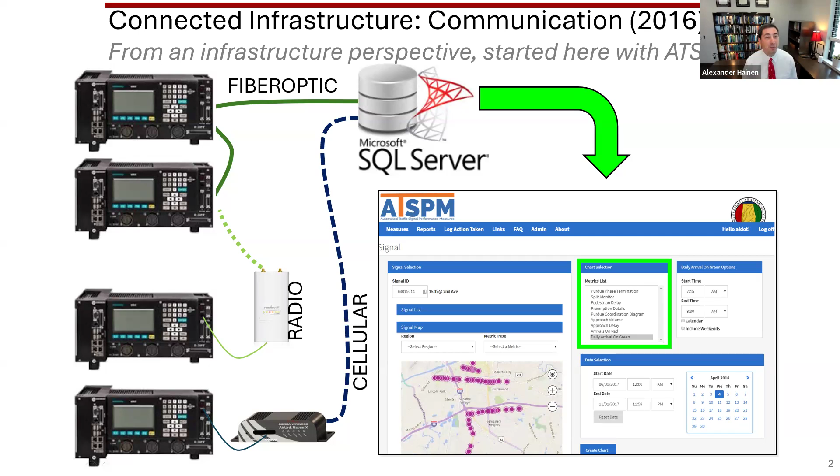A lot of the work that I do these days involves either getting data, seeing what's happening, or components communicating with one another, as you'll see. It was very unusual that Tuscaloosa did have an existing fiber network. So we've evolved that, we've added to it, and it's something that's a great asset that we rely on. However, you do see some other technologies such as radio and cellular that we were able to work with. So this is very old. This was the starting point. This is where it started.

On the ATSPM part, we had a colleague from Oak Ridge National Lab here this week talking about smoothing traffic, and that's what we're after too, is we're trying to look at arrivals on green.

Steven has a hand up.

Steven had a hand up. Okay, I'll just keep going here. Sorry about that, Steven. Sorry, that was an accident. Oh, okay, got it. All right, I was perfect.

So this is one of our corridors here in Tuscaloosa. Percent on green was one of the performance measures that we used very early on. It was very, very powerful for us. So we worked on a lot of coordination projects with the DOT. And for me, this was my first few years working with DOT engineers here in this state.

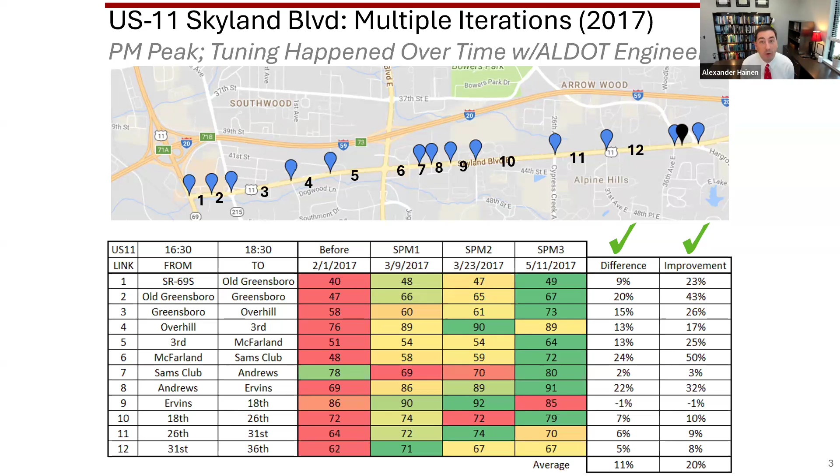That is a key relationship, and I just want to make sure to acknowledge all of their collaboration. This is something where they kind of took a gamble and said, this sounds kind of weird, but let's give it a shot. And it has grown and grown and grown, which is what you'll see.

Speaking of growing here, this was our second version of our TMC, our Traffic Management Center. We didn't have one here in this region. There may have been like a computer that was perhaps dedicated over at one of the area offices. This is the second TMC. We have a new TMC, which is right below me. We opened it up in January.

It is 6 times the size of this. So you can see everyone's packed in here. We use this for football, special events, anything. It's a 24/7 operation. We have students go in here. So we just continued building and doing more and more traffic.

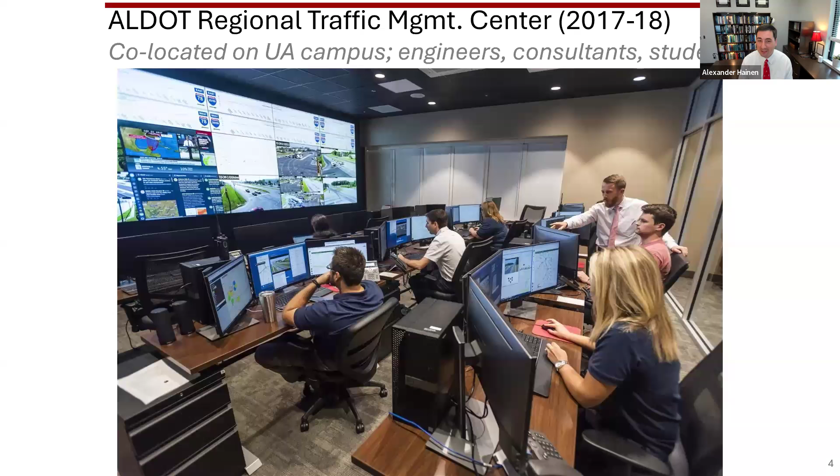I see Dr. B has a hand up. Just want to make sure. Dr. B? Okay, I'm going to keep going unless I hear that part.

So what really also got fun was working with all the manufacturers on the private side too. This was a pooled fund study that we got to be involved with. That person over there is a great, great colleague, Dan Nelson from Siemens. I think he's at a consulting firm now. But this was something where we were looking at the second generation of that signal performance measure data.

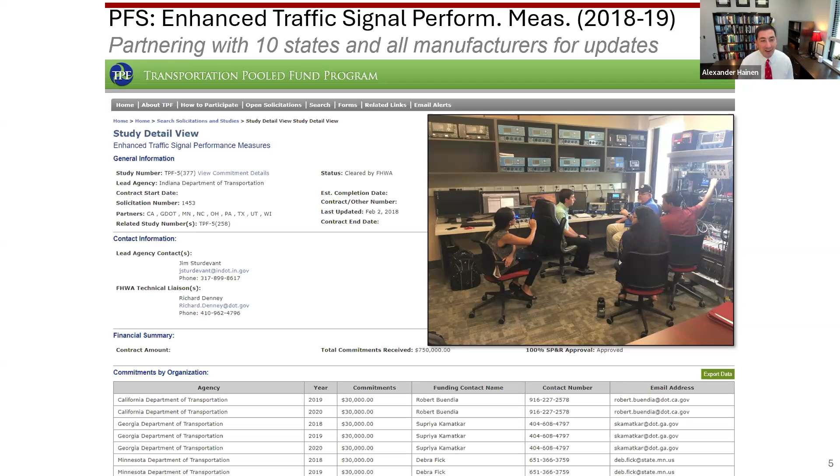I got to work with every other manufacturer of traffic signal controllers, Econolite, Siemens, Peek, Intelight, Trafficware. I'm missing one. McCain also, of course. But they came into our lab. They've been here. This is when my lab was in its younger days. Now it is filled to the gills. The last count, I think we were up over 60 controllers. So it's been fun just working with all the generations of technology and all the folks involved.

Around 2021, this is when we really got things pretty well implemented here. We were up to nearly 500 intersections, and we've got conversations going on with a lot of other areas, cities, municipalities to keep expanding this. So this is just the more recent snapshot. It's kind of been mapped into the Algo suite. You may see this logo in the upper right here.

So the colors changed again, but as we matured in our operations, that's also what we were able to kind of put this all together and start putting multiple things with CAPS, our Center for Advanced Public Safety. Hopefully you'll hear about them from either Stephen or Mazan. Tim Barnett's on this call. I see him here. So the safety aspect plays into that portfolio of products that we have for traffic systems here in this state.

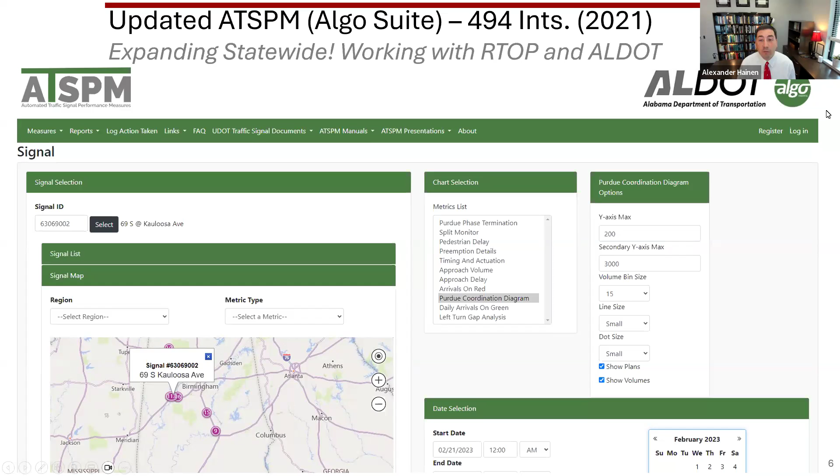The other one that we're working on, this one's newer. We've been working on it and tuning it and adjusting, is our management side or maintenance side for detection. We do a lot of sensing technologies that you're going to see later on in this talk. That's probably my most exciting area that I can't wait to share with you towards the end of this.

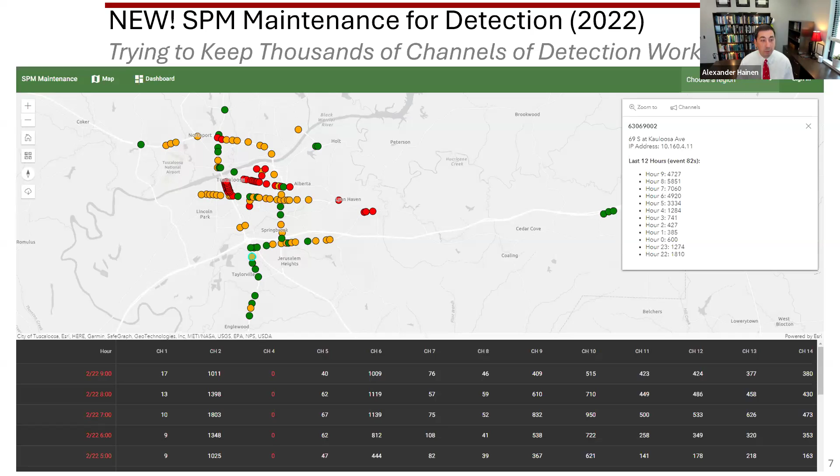We'll go through the connected vehicles and where we step through on that part in some of the rural suburban applications. But then we'll also talk more on the sensing and how this is changing. And we're really looking at some cool mapping, placing vehicles and things like that.

That set the stage for you for really, like I said, probably the first 5 years, maybe a little longer, with some of those last parts there. But now I want to talk about connected vehicle.

I just want to make sure that everyone knows here, I don't pretend to be an electrical engineer or a software engineer. At the end of the day, my favorite thing is to go out to an intersection and look at the traffic aspect of this. There's a lot of lessons learned that I'll talk through on some of the radio side on this. I'm glad I get to work with electrical engineering colleagues and folks who are better at getting under the hood on some of these. I don't want to lose sight on really the traffic side and what are we trying to do at intersections, on corridors, on whole systems.

And so I will probably underwhelm what you might be expecting on this connected vehicle side, but I'm proud of what we've got here. I think there's a lot of smart stuff that worked. And I think we're actually hitting sort of a second stage of this. I shared a video link at the beginning of this chat that gives an overview of where we partnered with Applied Information. That has gone so well, and I'll talk more about that here.

But the first few slides gave you the setup of the SPM, the communication backbone. Part of the upgrade was putting modems in there. I'll talk about that in a moment. But in 2017, there's a real fun story on how this ended up happening. We went out and deployed the first connected vehicle radios in this state. They were DSRC radios back in the day. I'm guessing everyone probably knows that term, but it's also been sunset now.

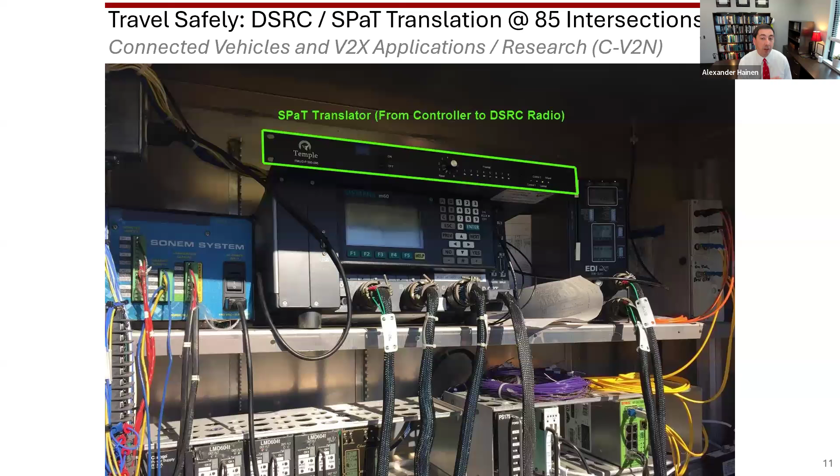But this part right here was meant to help a lot of this on the cabinet side, working with the controller to the radio. This is our platform. This is actually old now. This is the previous generation. The next generation was released at the end of last year. We went over to Atlanta to meet with the group. But around Tuscaloosa, this was cool for us.

We deployed this, and if you drive through Tuscaloosa, please do download this app, Glance Travel Safely. It's free. There's one for iOS, one for Android. If you haven't seen some of those videos online and demos, you can get that, and you can drive through all of our intersections today with what you've got in your pocket and get this information. There are some OEMs that are coming online with this. I believe Audi and Ford are pretty well integrated now. So if you're driving one of those newer cars, we're starting to see those pop up on our system too.

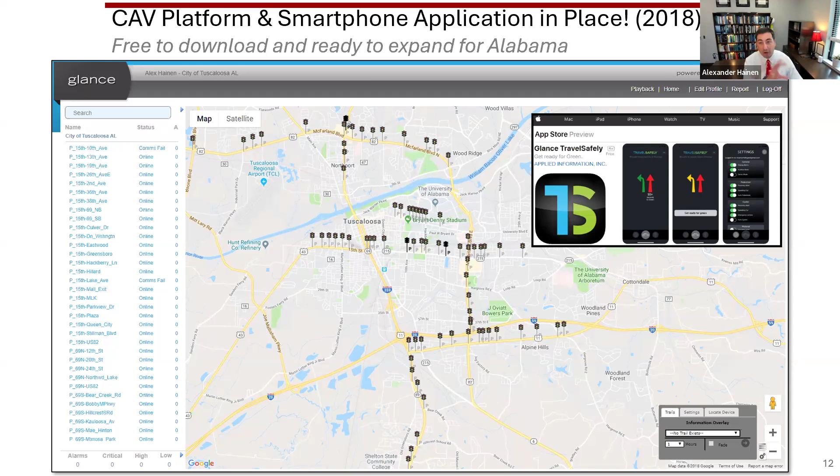What is interesting to note is that even though we had DSRC and C-V2X out there, we don't see a lot of vehicles out in the wild driving around with that technology. It was really still more of a test case on the applications that you might be after, which I'm going to come to in just a moment. There's one other mode that we use that's not so popular, but we've seen that it is actually more popular over in Europe, and I'll talk about a Germany trip that we went on earlier this year, that's including a cellular network in the model of connected vehicles.

The lower part of this was that old style DSRC 5.9 gigahertz, 75 megahertz of spectrum. Hopefully many of you have played with these things. We had really bad luck with them. We had things overheat. We had to do a Bluetooth connection to an Android tablet for an HMI that would overheat after about 10 minutes. It didn't go so well for us, but we kept going, we kept trying, and the C-V2X stuff is going better these days.

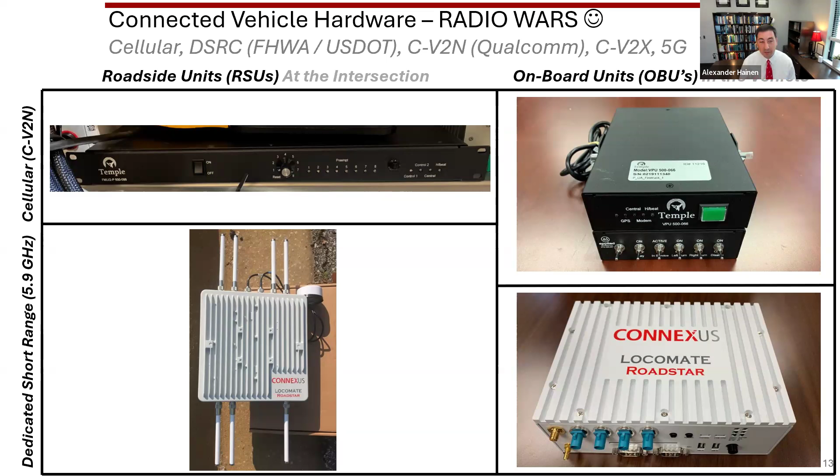The upper part is most interesting to me. Like I said, I'm not a radio engineer. I'm not an electrical engineer. I'm not a computer engineer. This up above was stuff that I could actually work with and get out there and start to do some actual testing out in the field. This is another great picture I took many years ago.

Back in 2018, we did a study on there, and the latency was somewhere around 400 milliseconds at most. These days, it's down below 120 in the testing that we've done with T-Mobile. So the latency issue, if you are doing critical applications, let's say truck platooning where they're following milliseconds apart, I would not want a cell network in that mix. But if you're doing SPaT, pedestrian messages, and things like that, you can probably use this to a lot of success; maybe 80 or 90% of the applications will work.

This shows the actual behind the scenes data that we were getting. This is a UDP dump that we get of the packets that come in here. When we talk about basic safety messages, I have to see things and put my finger on it. So at the bottom, that second row and the bottom row, those are BSM, basic safety messages. What that was is us turning on our phone, driving out around in the field, going on buses.

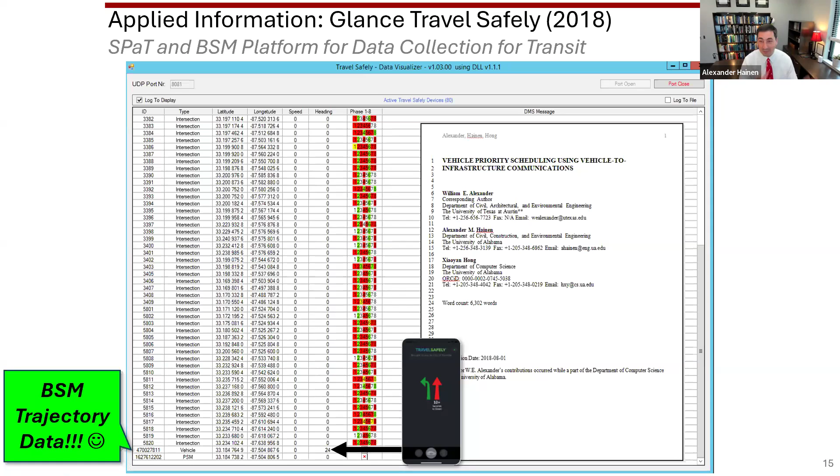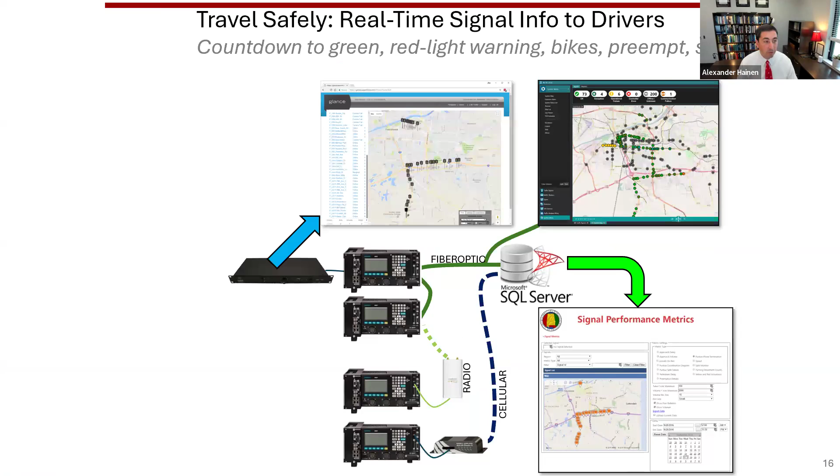We built upon this system. I mentioned I wanted to explain those first 5 slides or so to show you where this started. The start was to get a network going with modern controllers and data logging, but then we added to it with central systems, with our SPAT translator and our connected vehicle platform that we had, then adding our DSRC radios.

And so if I remember back, I think it was at Ajit Pai, and there was a whole bunch of chatter with FCC, and they reallocated that spectrum. And so a lot of stuff's changed since this was first deployed.

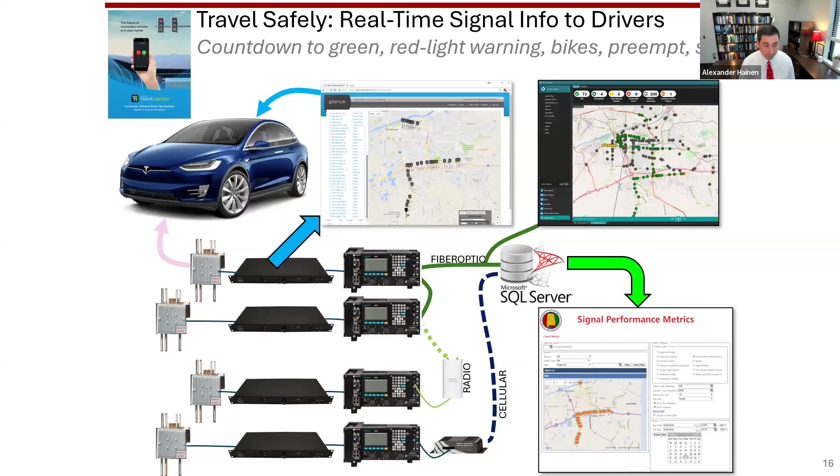The first time I saw this figure, I spent 45 minutes talking through it, so I can't spend that today with y'all. I loved it. I mentioned that we have to think about what information is where and how do we want it to flow. So whether we're out on some signal controller, how are we going to get it out to a device, a vehicle, an HMI, whatever that endpoint looks like?

Are we going to go over C-V2X? Are we going to go over the cell network like I mentioned through a mobile app? Are we taking in 900 megahertz EVP, TSP signals? So trying to think about where the information is, how we want it to flow, what paths it will go.

Is each path viable? Is the latency going to be okay? Is the bandwidth okay? Those are all things I don't know, but it's fun to just go ahead and talk through these things on whiteboards and make sure that this is going to work when we go out to deploy this and do the testing.

This is a temporary HMI solution until this information comes into the driver information cluster or maybe some sort of infotainment platform. And it's really supposed to be auditory, non-visual, that we're leaving it alone. So we're not touching the phone, we're not interacting with it.

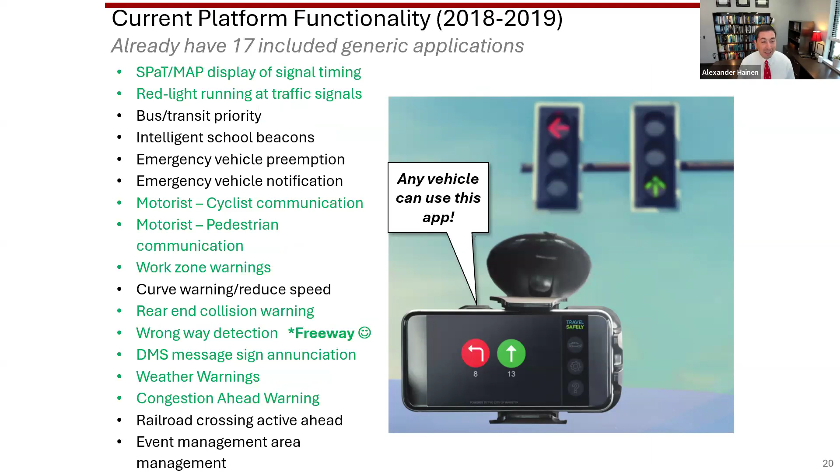Lots of good applications that we had working on, again, on the cell network side, which I used to be really embarrassed about. People used to make me feel ashamed about it, and that was okay. I'm proud of where it is today. So, but yeah, that was good.

We did spend a lot of time looking, and this was out in Fort Collins, Colorado, looking at yet another DSRC radio. I know there's a lot of folks on this call who are experts in cybersecurity. I'm not, so that's something I just want to be able to take for granted and get back to the traffic application. There are folks who spend a whole career studying cybersecurity in transportation systems, and that's critical. I would rely on folks like that to make sure they're able to help and say whether these things are safe, secure, with protection all in place appropriately.

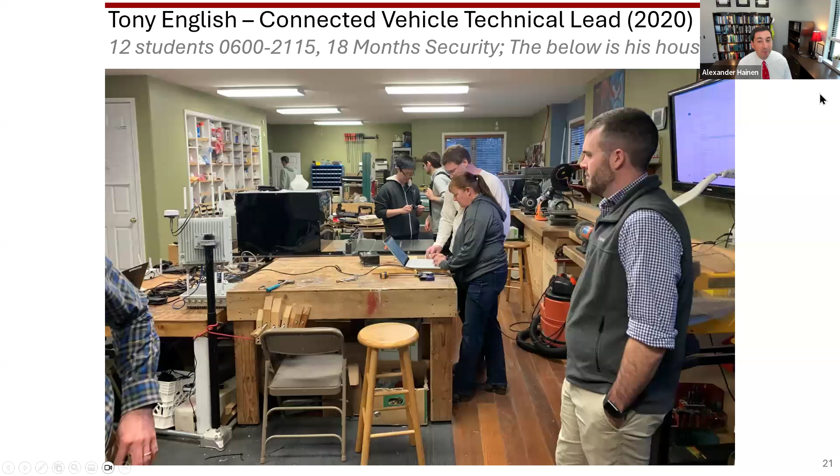There was a lot of struggle with antenna design. In this particular vehicle, the Suburban, the roof was so large that it was a problem, we were trying to run these cables out the sunroof and make sure there wasn't interference. Again, I'm not an antenna engineer or an electrical engineer, I was a frustrated traffic person who said, why can't this connected vehicle technology work? So this was just stuff we continued to battle through.

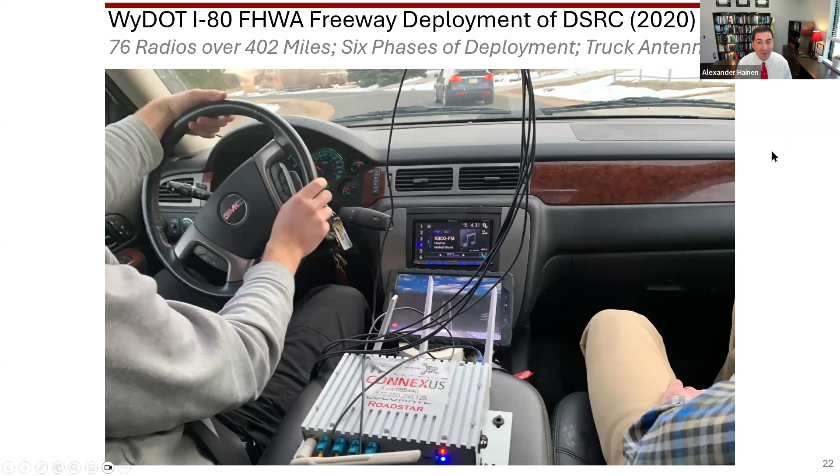And so we went out to see the Wyoming deployment, the official one of three. I did go out to New York and talk with New York City about what they were doing. I have not been down to the Tampa one, I've driven through there, I've tried to ask Dave Miller from Siemens, but anyhow, this was us just trying to explore and see what we could come up with.

I do want to make sure we are moving forward with CV2X. This is a military project I won't talk a lot about here, but we do have CV2X testing going on this campus. Matter of fact, last week I deployed 5 CV2X units here for an FTA transit project. So we have gotten involved.

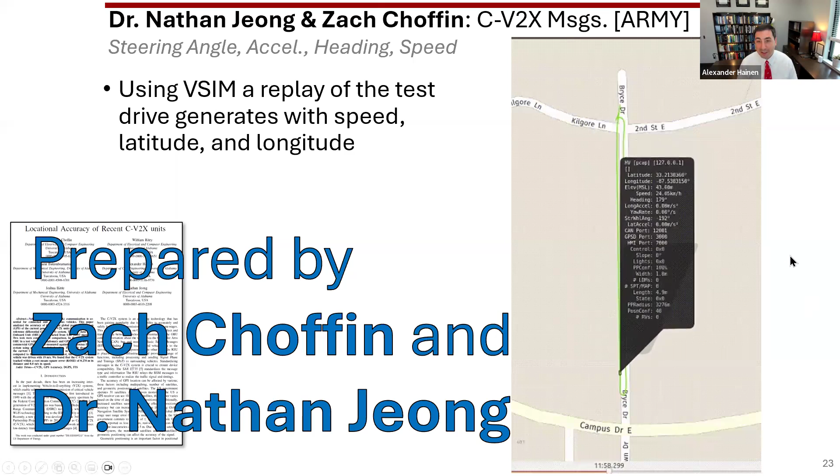Zach Choffin just finished his PhD, and then Dr. Nathan Jeong in electrical engineering, a colleague also on the call, Dr. B. This has been a group we've put together to make sure we are still going after the official way to do things. But for me, at the end of the day, I'm still traffic, and as long as I get my traffic applications, I'm pretty happy.

When we started doing connected vehicle technology, ALDOT came to us and said we want to think about how we want to use this. So we talked and brainstormed, and their first idea, which was interesting to me, was that they really want to use it for freight in this state.

Alabama is a port state. Mobile has a lot of freight coming in and out. There's a lot of freight along the river, the Black Warrior, the Tombigbee, and stuff coming along the I-65 corridor.

So we had an issue, and this was kind of an impetus for this proposal. We had a truck overturn - a safety issue, a freight issue, an operations issue. We had to close down this stretch of road, one of three major routes through Tuscaloosa, so we routed everything onto McFarland. The only problem is there are 26 signals along there.

We've gotten pretty good with our management center on that, but for some of the just-in-time, just-in-sequence routes coming through here, we wanted to partner with industry and say, when these situations happen, we don't want to disrupt what's going on. This was a great working relationship that the DOT maintains with local industry around here.

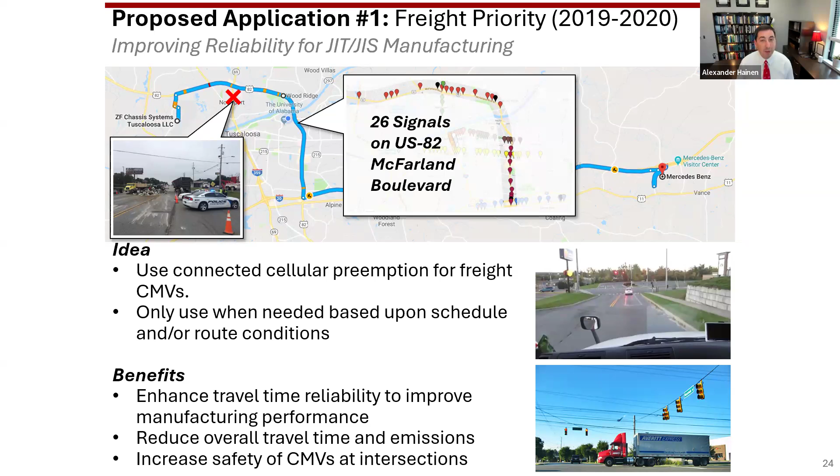You'll see ZF is a chassis supplier, and on the right-hand side out in Vance is Mercedes. Those are pretty critical supply chains that are big economic drivers in this city and in this county.

So this next work is probably one of my favorite applications I've gotten to do since I've been here. Dr. Sufyan Talukder, he's down at AECOM in Florida now - he was my second PhD student, sorry. He graduated, I think in '21, so he's been down there for a few years now.

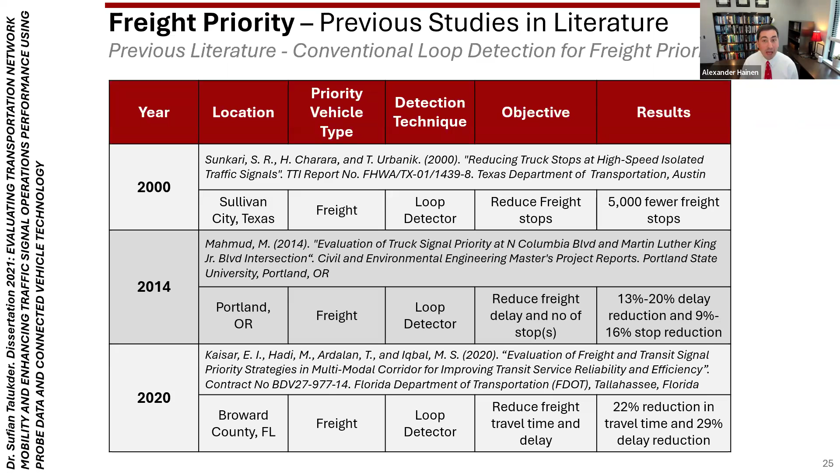We started looking into how freight priority systems were done. Traditionally we were doing some loops - on McFarland we had what are called system loops or discharge loops. And we saw there were a lot of issues with that when we started looking at the ETAs of trucks arriving at the next intersection.

So we wanted to come through this part. We were looking at connected vehicle technology to design a signal priority system that would improve on the traditional loop-based priority. The ETA stuff back in the day is what we were calling it - it's more morphed into what we now call NTCIP 1218.

I've got another CS student, luckily, who came on board this semester, and we're working through taking in some of those objects and using the V2X hub to translate and pull those apart. And the last bullet, probably my favorite, is we did a lot of field testing on this, and that's what I want to share.

We learned more on the communication side, which isn't what I was after, but we had to really dig in and figure out what was going on.

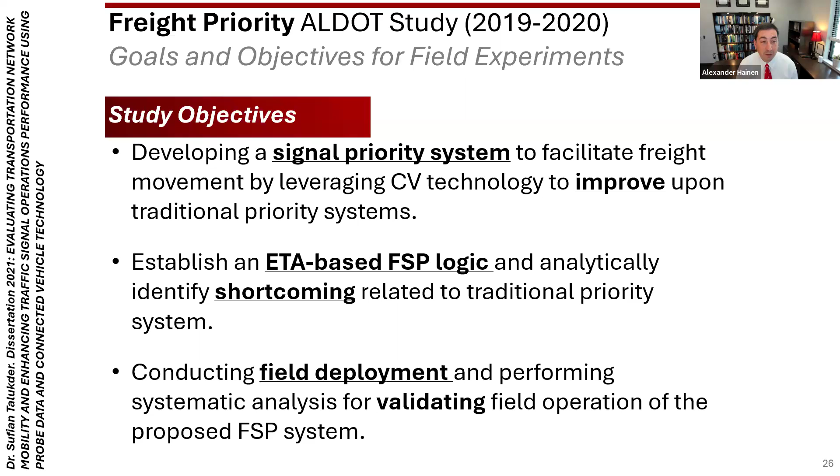I'll go quickly through these slides, really just talking about a few things. We're trying to figure out the time of arrival that we would estimate based on some loop pulse we'd get. If you design for 50 miles an hour, you can place these loops appropriately at 50 seconds, 20 seconds, and then have checkout detectors.

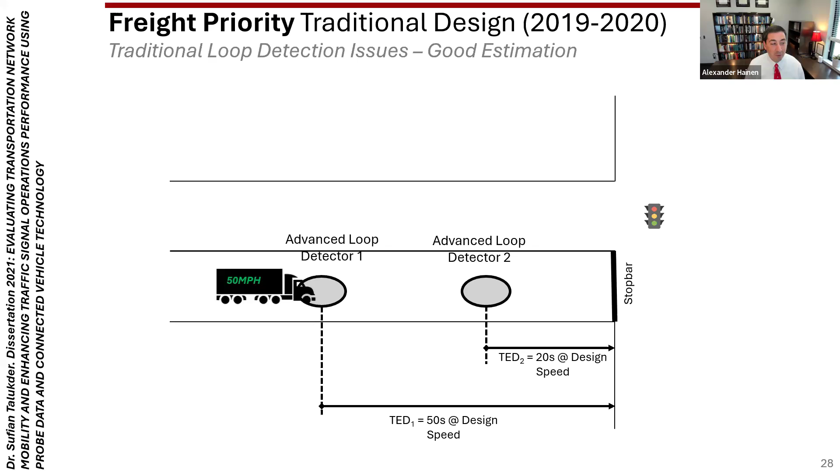The truck coming through, if it's at the design speed, everything works great. You're 50 seconds away from the intersection, we know what to do, and the controller can start making calculations. We get a second check-in at 20 seconds, the controller updates its calculations, and hopefully the speed has been perfect with no variation at all.

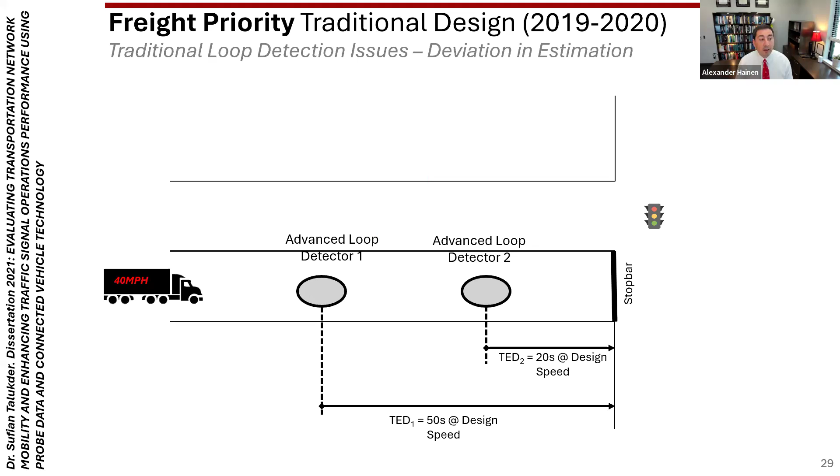And hopefully everyone says, yeah, right - of course there's going to be issues. So if I have a truck that's not going that speed, all of a sudden all my assumptions are wrong. And this really does have an impact on how the system works, both for itself and for other drivers.

I'll show you that in just a moment. If we start making estimations that are wrong, that's where we run into issues - even though I think that truck is only 20 seconds away at 50 miles an hour, at 40 miles per hour I'm actually 25 seconds away at that design speed. That's a problem.

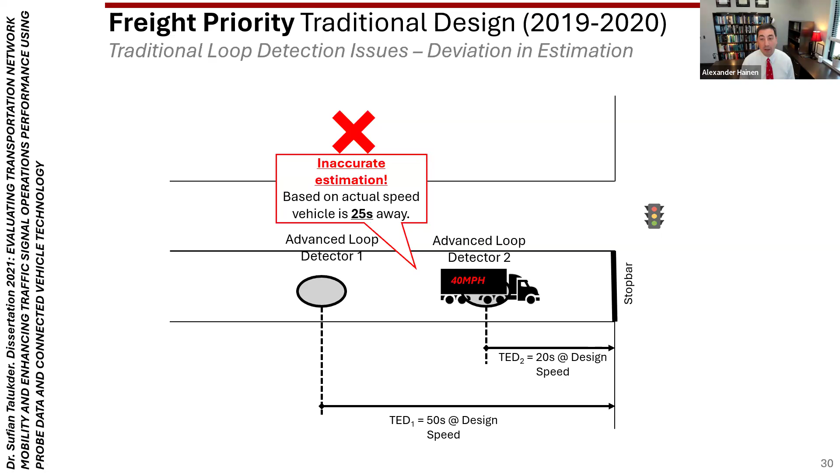And so as we start to take a look at what this looks like, I'll show you some time-space diagrams. We changed - we did all of our stuff with ETA through a proprietary system. We think we'll be able to do this through CV2X in an open platform too. It's just new technology coming around, and that's what we're working towards on some of our FTA work with transit - similar concept, different application.

This is showing preempt ETAs, channel numbers coming into controllers, and we're going to have this externally managing and doing better information delivery to the controller.

I think there's a big gap that I see personally. I work with signal controllers quite a bit. I see a lot of research that gets done that's really good, but then the first question I have is, how do you get that to a controller? How do you get that information in? Because remember, controllers only work on right-now inputs such as channel on, channel off, loop on, loop off.

There's a metal object over a coil of wire, or there's no metal object. So trying to work around some of those things, there's been applications that have done quite well with that. Adaptive systems, some of these priority systems too.

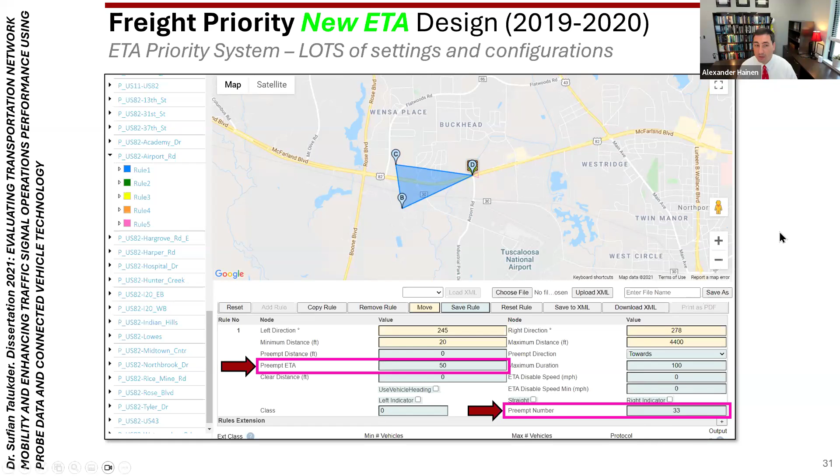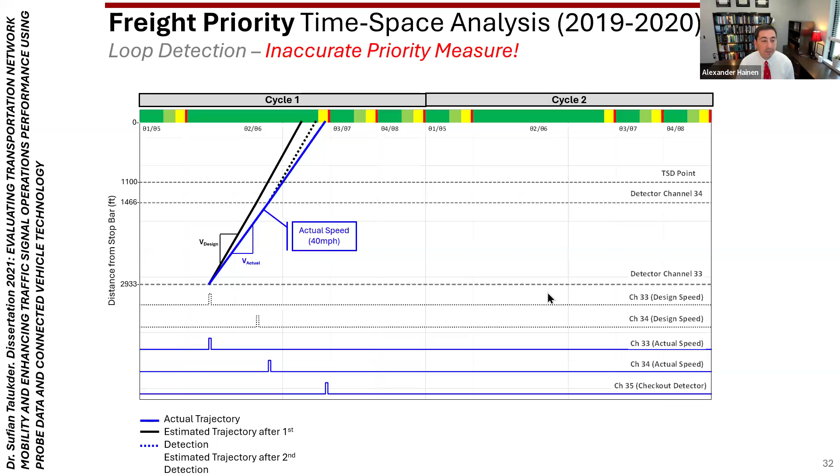Okay, so back on this part. What I wanted to show you, this is a diagram where we were able to look at the information that came in for each of those channels for the different check-ins and see what would be the implication if a vehicle was not following a design speed and an actual speed. There's a lot of animations here, but really what I want to show you is at the end of this, if we do a wrong prediction, we're going to miss it. Then there's really no point to this priority system at all.

So when we started working with ETA-based systems to get better estimations, we could do a whole lot better. You can see that instead of just being a pulse over a loop, this is more continuous information that we can get in there, that we can have logic statements to provide better, more accurate information of the vehicle and how it's moving. I'm going to step through a lot of these for time management, and I'll show you the results, which is the exciting part. I included too many slides; I was excited to share this part.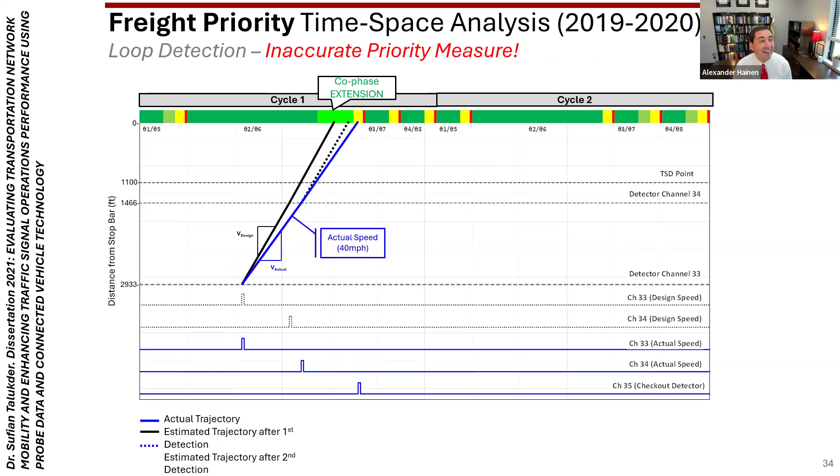But a lot of these things, trying to figure out how do we make decisions on either early return to green, extended green, are we going to hit the coordinated movement and be able to get through there without any disruption at all? This is the type of math that we had to dig into quite a bit as we were designing this system. If you've worked with priority before, I'm sure you've done these calculations, setups and programmings, but this was us going through.

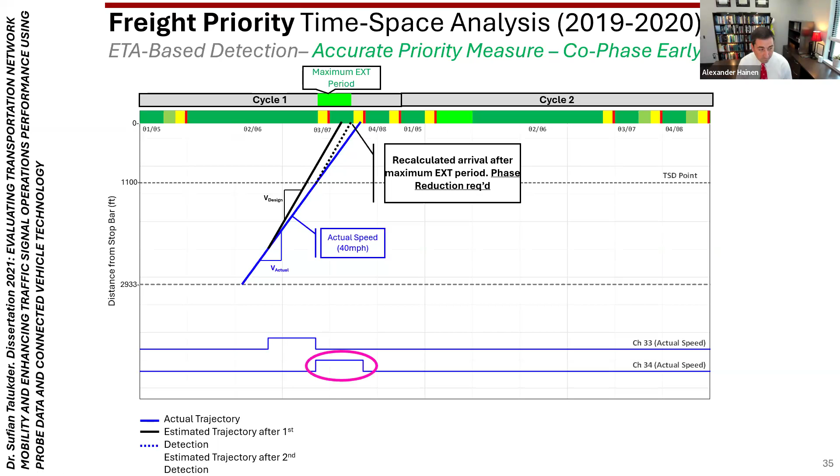These errors that we did want to look at, I want to show you the actual part here. We started looking at the time of entry in a cycle. I think we were running 120-second cycles here; I think we're running 150 these days. But depending on the speed that you're going, the number of errors that you can make changes. If we're driving through the corridor at 50 miles an hour, we're not going to have any issues based on that design. If we deviate to 49 or 51, we still have zero differences.

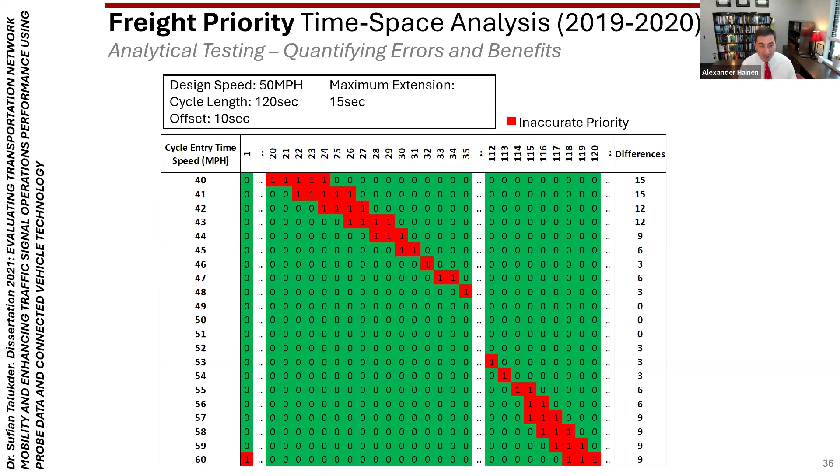But once we get more than a mile or two per hour outside of the design speed, all of a sudden we start to have a lot of errors, which would cause wrong things to happen. Either a truck is going to have to slam on the brakes at a very bad spot, or they're going through a signal that they don't want to, or there's an extended delay because we made a wrong call on the priority. I'm going to show you some of the exciting stuff, and really the final result of the video is the best part.

This is still just quantifying the errors, trying to take a look at if we deviate at all from the design speed, what ramifications that would have on poor operations. We tested this on the northern part of the corridor, only 13 of the 26 intersections. This is north of the river. There's a pretty good logical break.

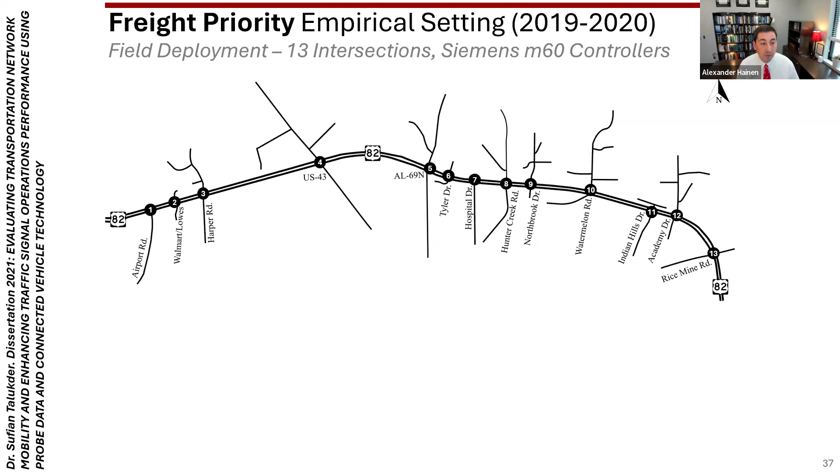South of the river, there's an adaptive system that I won't bring up today, but this 13-intersection corridor was a great test bed for us. This was us driving through. Again, there were two modes of communication. I think I've got a little infographic to show you.

A truck coming through the intersection can communicate directly to the intersection within about 1,000 feet. If you're an electrical engineer, you will not believe that, and that's fine. We'd have to do some sort of packet error rate or signal loss test. Nominally, we say at about 1,000 feet we can start to get to the intersection. I'll show you what that looks like.

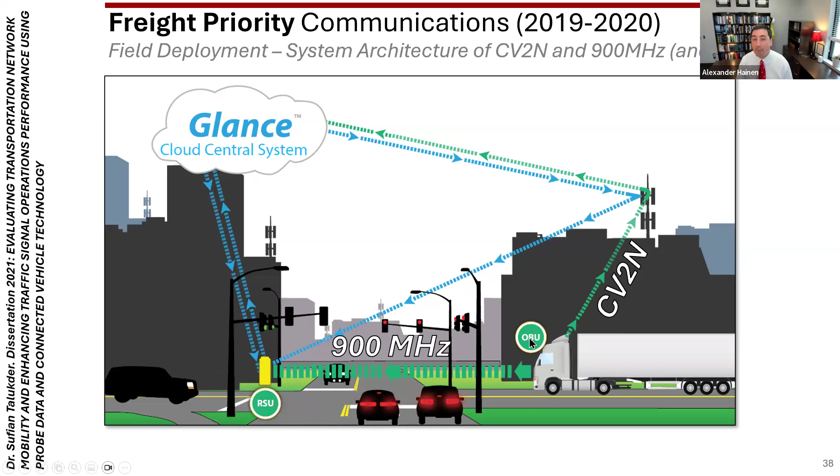However, if we can't communicate at that distance, we can also go over the network side, CV2N, to bring it into the cabinet that way with the other component that we installed that I mentioned. So this is a very simplified graphic of how it's supposed to work, and it did work. But we did find instances where these communication paths would drop out, and then we'd have to figure out, do we have a redundancy that we can go over?

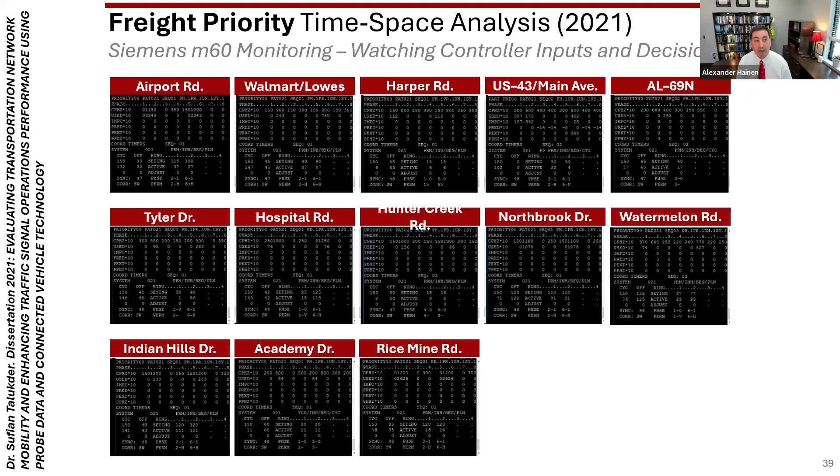We spent a lot of time watching the controller make decisions. This was running an old version of SEPAC. I don't think we were on the 5.x yet. I think this was back in the 4.x days, and actually the 3.x days for the SEPAC side. But these are all the controllers. ALDOT let us log in and watch the decision-making process of these controllers.

We had a lot of information on logs coming through. Those logs are what we were using to check: did we get cell communication? Did we get both? Did we only get radio? What was the time that we received the check-in times for different distances here? So we would give ETAs on this part and be able to watch all this. There's a lot of parsing this out and getting it into some digestible results.

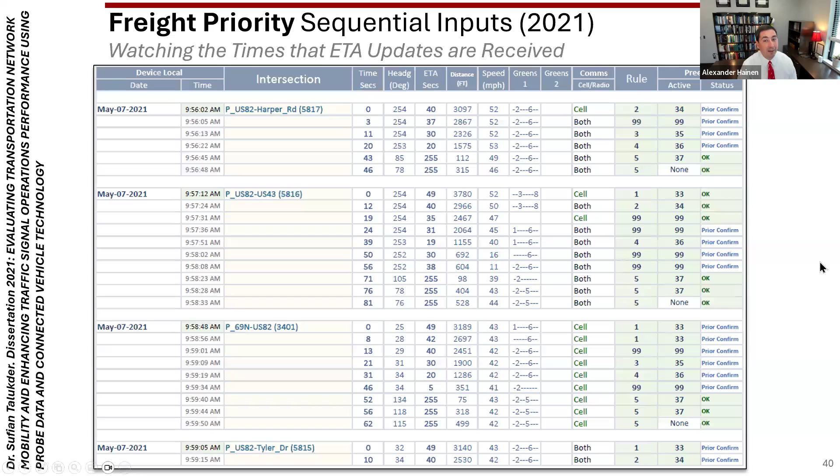We also paired this with, like I said, our backbone ATSPM data. We had great signal data that we were recording. Putting all of that together, here's a very, very important slide. We did multiple different test drives on this one, starting in April, going through May, and we were looking at how we drive through these 13 intersections.

How did comm go? Did we catch the green band? Did we have to early return to green? Did we have to do an extended green? So there were all sorts of different operations that we were looking at. Some of our base runs were up in the 13 to 14, even 15-minute range. When we were running with full communications, we were getting down to 8 and 9, making it perfectly through the corridor without stops. It was really cool for us to see that.

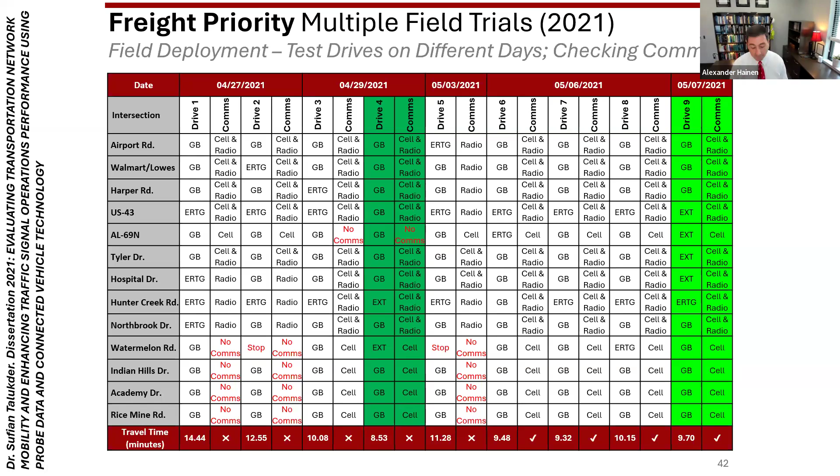When we actually quantified it for the paper, that represents about a 47% improvement at best. So this was big for us. We were excited about this. This was something that we could go ahead and put on trucks, probably conditionally. We didn't just want to give them the green light all the time.

I've had people ask me, are you going to start selling green time to pizza delivery companies? And the answer is no. That's where working in a partnership between the DOT and the private side comes in: we want to figure out when is it appropriate, and how do we do that effectively? We've actually got another DOE proposal that we've worked on that hopefully we'll be able to expand upon that topic.

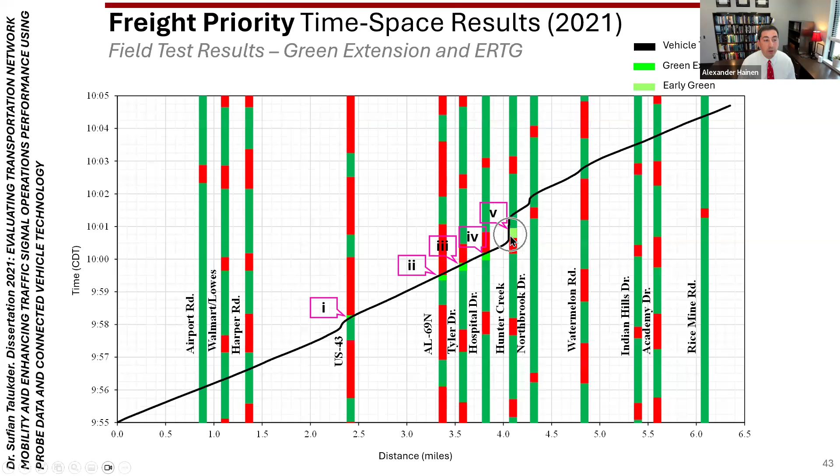But this is just showing a time-space diagram going through the corridor where we did get something like a green extension or an early return to green to try to get that truck rolling as quickly as possible. This really exciting result on this first row is where we came up to one of the larger intersections, US 43. This showed our system working perfectly as we designed it.

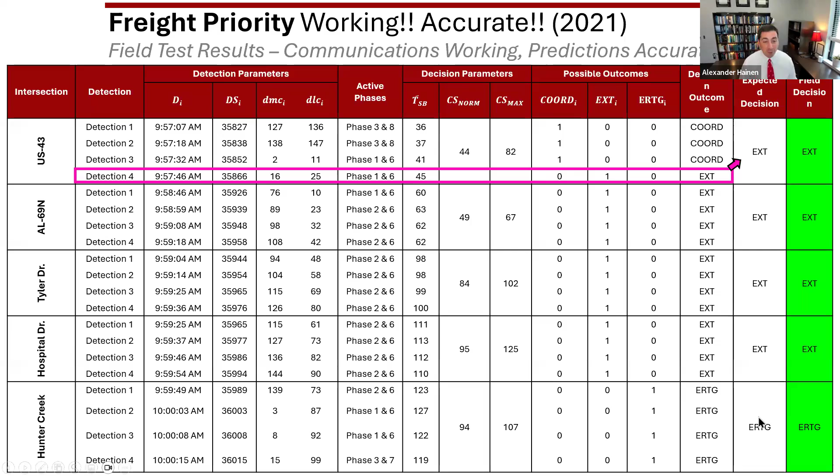The early estimations were that we were going to go through on the coordinated green band, coord. On the very last check, it said, hey, you're not going to make it on coord. You slowed down. We are going to have to extend green. So they made that decision and it worked perfectly for us. All these decisions, whether it was extended green or early return to green, worked really smoothly, and it was really fun to go through this.

I probably won't show this whole video. It's on my YouTube channel. We were able to drive end to end on this corridor without stops multiple times. This is one that we documented in detail where we're watching every controller front panel. We're watching the information flow in on all the 50, 40, 30, 20-second check-ins on the ETAs.

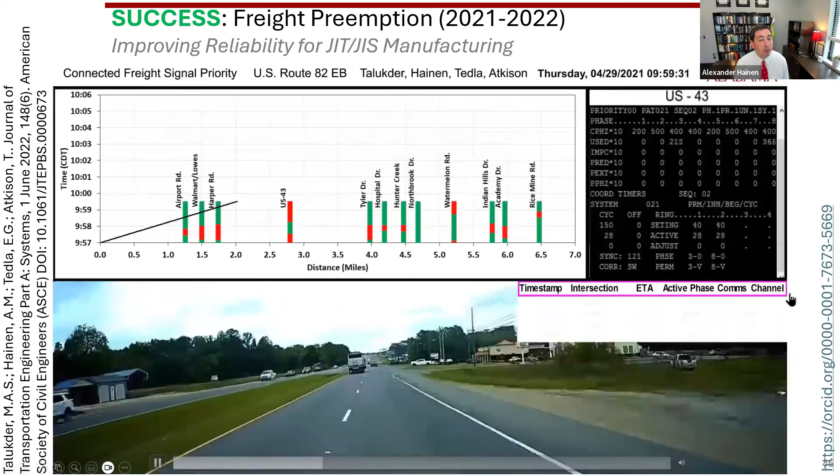So coming through, there's two spots where this one got a little sticky, but truly, when you take a look at the time-space diagram, I'm going to fast forward to some of the latter part of this. Coord green, we made it through there. I think we're going to come up priority green extension, coord green, come up this hill, which is actually a challenge for the trucks. That's another thing for us to consider as we're looking at some of the geography, priority green extension.

And so as you look at this time-space diagram, I'm going to try to pause it at the end here. This is one of our perfect runs. I think this was the 8.5-minute run that we made it through all of these intersections. The last one will be coming up. But that right there was the improvement that we were able to make on that part.

There is a lot of truth to say that if you have good coordination, you'll make it a lot of the way, but the trucks have a lot of different dynamics. And so that's other parts that we're able to factor in and take a look at how they're driving through these systems. So like I mentioned, this is probably one of my favorite applications here.

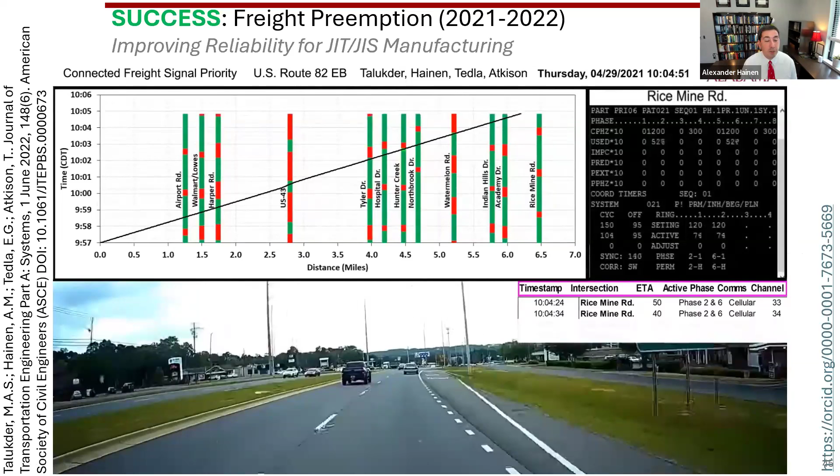With the remaining time, I do want to shift gears a little bit into some of the more trajectory-based control, which is what I was interested in. When we talked with ALDOT, their number one was the freight priority. Our number one was saying, how do we get BSMs into a controller so that we're doing call, extend, delay measurement, and we're trying to optimize that way and run a controller differently instead of just using traditional loop calls.

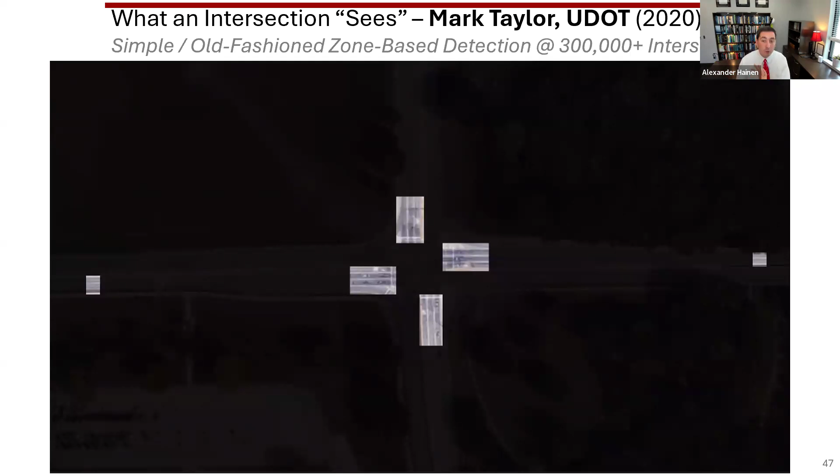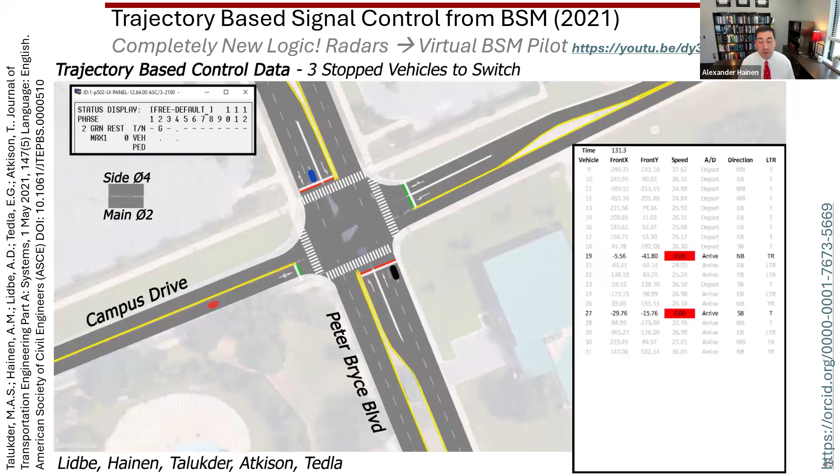For us, we were just trying to come up with some simple logic. This one was really cheesy, where we waited for 3 vehicles to be stopped and then we would change. It actually was quite effective, but it's not the best logic. And there were so many applications or algorithms that we went through to try to take a look at how could we improve over just running free at this little intersection we have on campus.

Ultimately, this led to a paper that we had in ASCE where we were measuring delay. The delay is what we ended up using as our measure to be able to reduce and optimize for this intersection. So we were so excited when we got this paper done, and this was probably about 2019. I think the publication was in '21 after Sufian finished up his dissertation there. But we had this thing going along. We said, how are we actually going to do this out in the field? How can we measure delay?

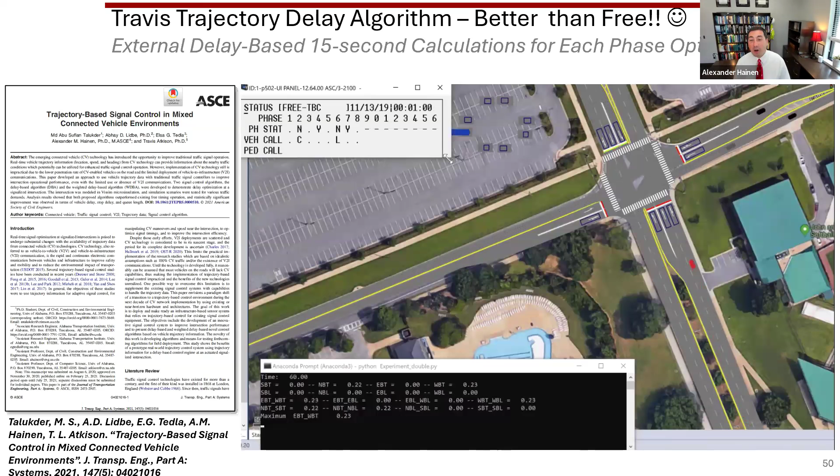So I was at TRB, I was at the vendor hall, and I talked with Brian Griggs from Econolite, and he said, hey, we have a new radar system that's going to measure trajectories from every vehicle. From there, we're going to turn those into objects and be able to use that for delay calculations inside the controller.

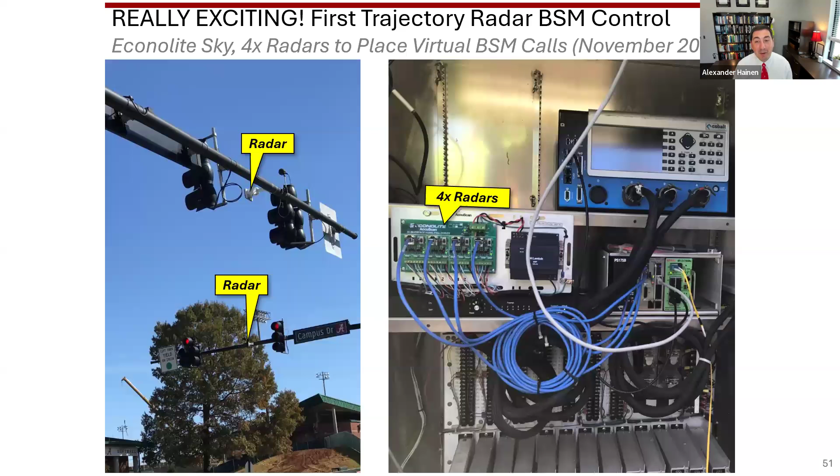Now, if you know about traffic signal controllers, they are not the most powerful computing units that are out there. The Cobalt, if I got this correctly, I think it's a 625 megahertz processor, which is, I think, the most powerful one that was out there at the time. The Siemens, the old controllers, were down there at 25 megahertz running OS 9. They didn't have a lot of calculation or capability for computation. So on this, we actually got a prototype product here. The folks in Tennessee use these a lot from what I understand. This is a connected vehicle coprocessor.

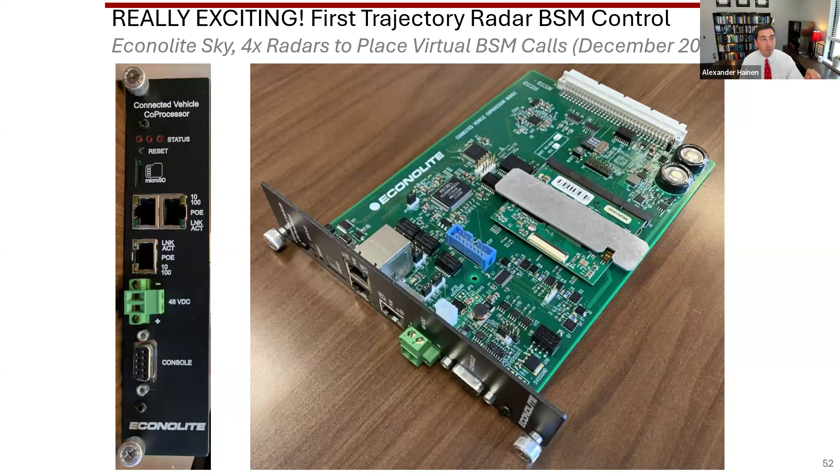It's a secondary computer that goes inside of the controller that's able to do, if you want to call it edge computing or whatever, that's fine there. But it's doing that computation on this card, interfacing with the signal controller through their platform that was called Sky back in the day. So we were testing on this one.

This was fun to go out there. This was 2019. It was pretty cold in Alabama. It was probably like 50 degrees. That's a joke, kind of.

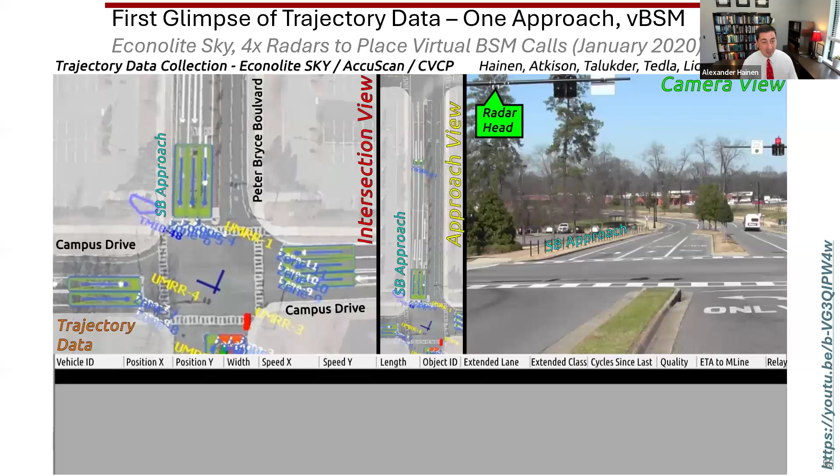Just to show you a pretty good snapshot around January of 2020, this was when we got everything working together, lined up. I'm going to come forward just a little bit in this video where you can see me and my car getting connected vehicle information, SPaT information from the cabinet, the radar's tracking my car coming in. The radar has me as an object. I also have my BSM coming in on my connected vehicle platform. So this was everything glued together.

Safety applications. This was quite a chunk and quite a good milestone for us to hit, especially right before the pandemic happened there. But that's probably the snapshot of where we got to on connected vehicle.

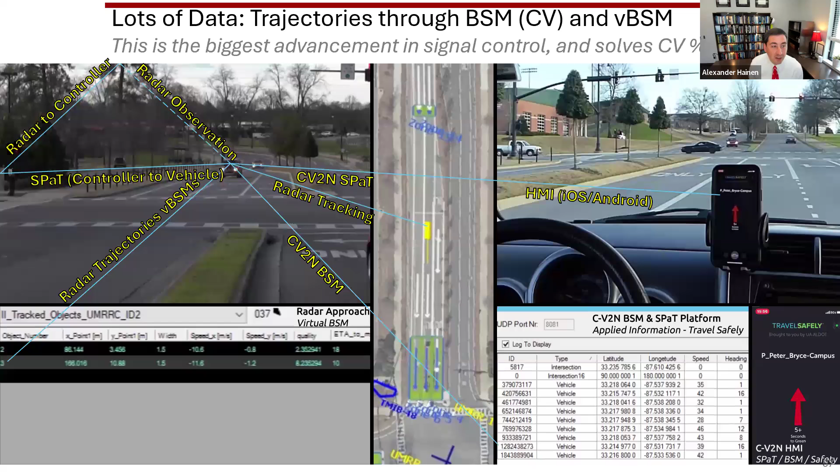Like I mentioned, the flow of information, it's really fun to think about where all this stuff's going. What are we sharing? Who needs it? Does a controller need it? Does a driver need it? Does something else need it? Even powertrain, we're trying to think about that. Can we get it to a vehicle that can make a decision on what to do as far as idling or shifting or whatever?

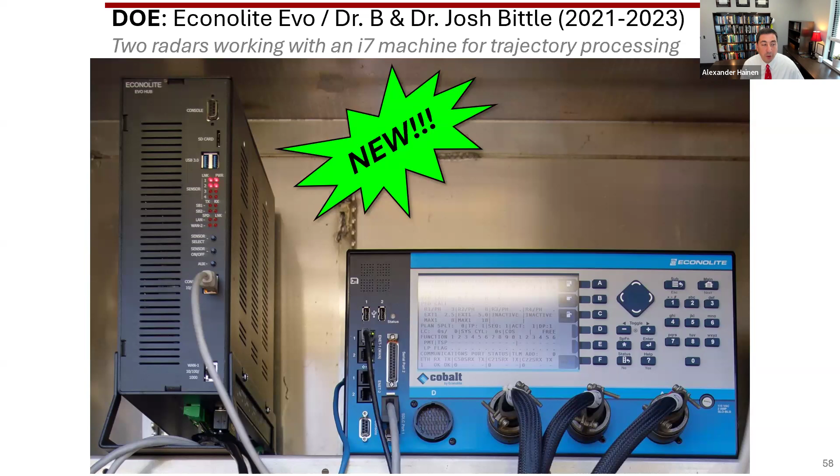But as we take a look, this evolved into what's now the Econolite EVO. Hopefully many people have heard of this platform that's out there. This is a pretty intense radar system that's able to go out and get even better data than we were seeing with the AccuScan or the Smart Micro platform that was under Sky. This is showing that same intersection. So again, we're getting connected vehicle data coming in.

I say connected vehicle data. I want to be careful. I should probably take those words back. We are using this as sort of a surrogate or temporary placeholder for connected vehicle data. I think, or hope, as I'm sure many of you do, that in the future, we will have that more readily available.

I'm glad I'm a traffic signal person. I'm not a planning person. I don't need to track you from your work to home trip. I don't want to know anything like that. I just want to say, if you're within a quarter mile of an intersection or 1,000 feet or whatever that distance is, how can we safely and efficiently keep all that traffic within that bubble distance going through the intersection as best we can? Best is one of those words that I understand, safety or operations or efficiency. We can talk about all of those things, but that's really what we were after.

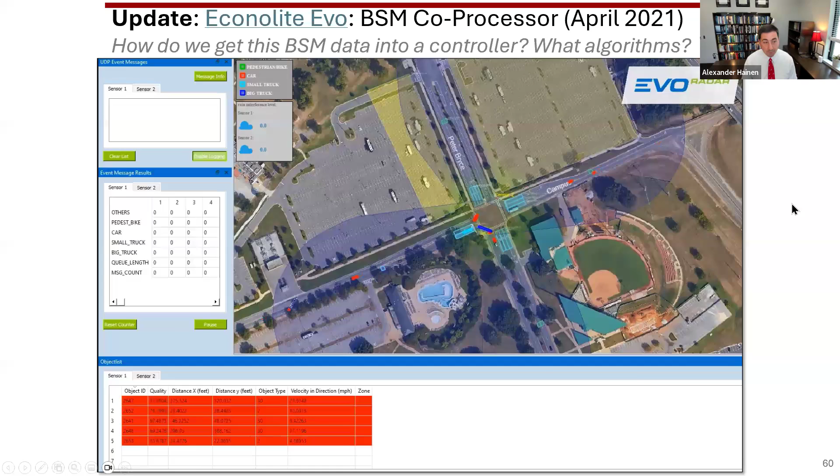I think in the future, TMCs will have maps with every vehicle on there. I'm seeing that at least in one central system and another central system. So it's coming now, where a lot of our central systems, we run a Centracs system. It's great to see the green, yellow, reds, but what's missing, unfortunately, is the vehicles. But with the detection systems, we can actually get the vehicles placed on there.

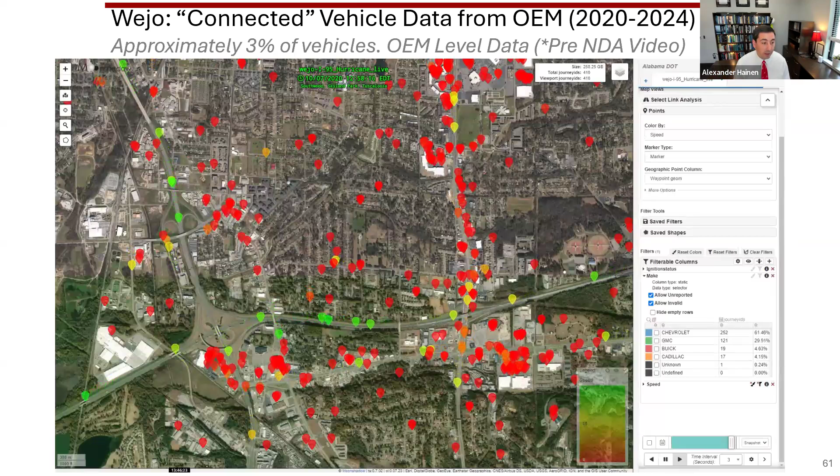So I think in the next 5 years or so, that's gonna be pretty common that either a camera or a radar or a LiDAR will place vehicles so we can see where those queues are and how vehicles are operating. So WEJO data, there's a whole other talk. I'm not trying to get into that one today.

This same intersection, if the camera wasn't convincing enough, this LiDAR system that we've got, this is a fused 3 LiDAR system from Seoul Robotics. We're actually deploying the 2nd gen coming up this month too. This was from about 2 years ago. So this one will get the upgraded one, going with a Blue Band platform to be able to do even more measurement of all sorts of things.

I do love this video in particular because as class lets out, this is a huge classroom building here at the university. You can see the students flood out through here. So when we want to start to think about safety with vehicles, pedestrians, cyclists, this is a detection or sensor system that will allow us to do that. So this is our latest, most exciting one, I'd say, but there's some camera systems that are just incredible too.

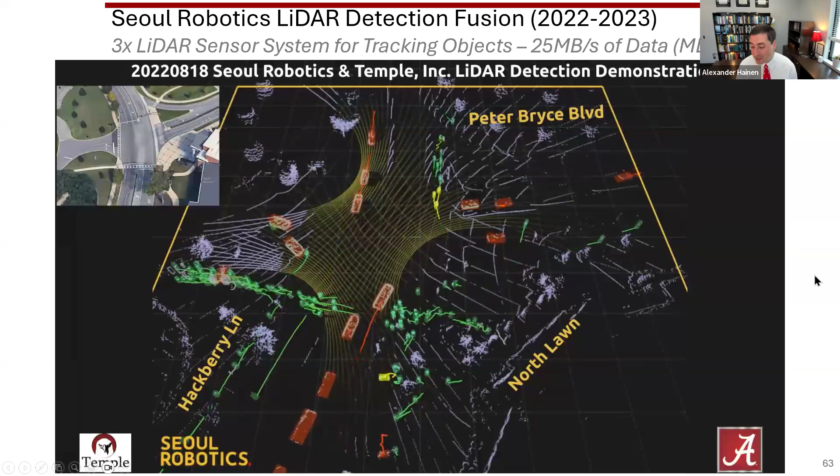I like the ride share where folks are getting picked up. So now we can take a look at different types of trips. Here comes a cyclist or a little e-bike that's zipping right through. So all sorts of micro mobility, shared mobility. These sensor systems are really opening up some cool insights for us. I'll skip this one because this is probably just pairing them together.

Last few notes I've got, just a few other projects that we're working on. Over the summer, yes, Alex, go out and sweat and change 7 cabinets to ATC cabinets. This is a brand new intersection, but we had 6 other intersections that I manage and operate. And we did new 32 channel ATC cabinets. I learned a ton on ATC. I don't know if Ayrton's on this part. Ayrton is like the best signal person that's out there for training on it. I had never been trained up on ATC. So if you have any ATC questions, there were a lot of lessons learned on SIU, BIU, trying to figure all that out and sort it.

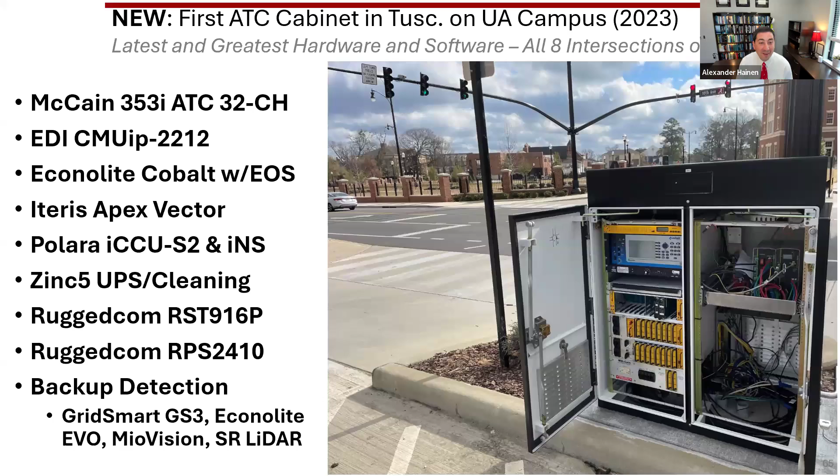So these are camera systems that we've got on campus now. This is a new Iteris Apex. This was the first 1080p video detection platform that I could find. Working with folks like Nader and Allison to hopefully get more ML applications on it. We want to get a lot more data coming out of this. And this is stuff we have live that we're able to pull from. Students will work with it, and that's fun to be able to share these feeds, so that way they can do more testing and whatever they want to try to deploy.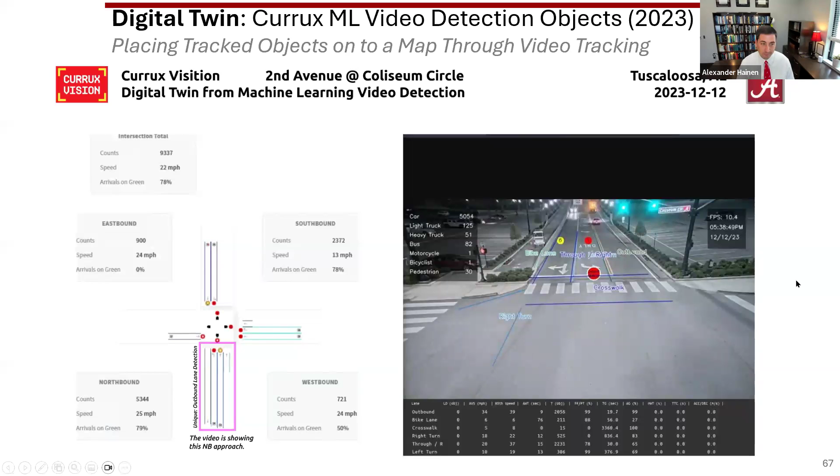I think it's going to be sooner than 5 years, but 5 is a safe bet.

Last part here, I think I'll be pretty good on time. We have some other large applications. This has been a fun freeway arterials project. I'm working on an ATCMTD project. I don't know if Elsa's on the call, but others have been involved with this. It's a freeway stretch where the Tennessee folks went with the I-24 corridor. For us though, on this rural suburban application, we said, what can we do to help our traffic management center with freeways and parallel corridors and routes. So this has been a good project.

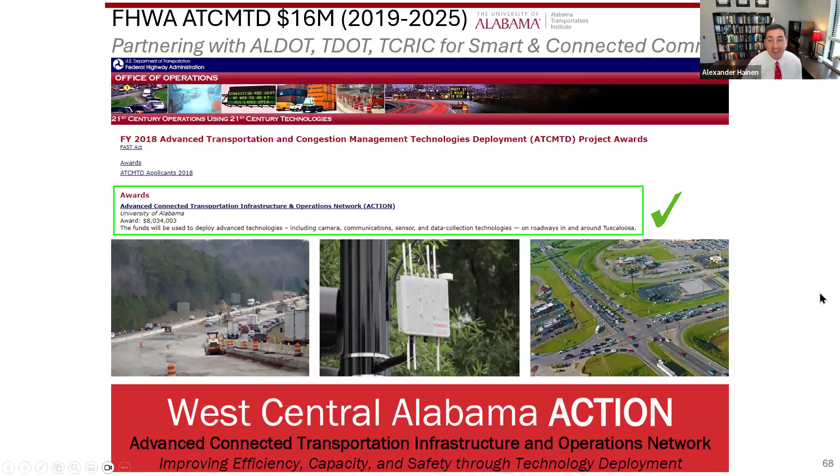We've got our traffic management center now equipped, watching and managing this. We're working on the evaluation report for this project.

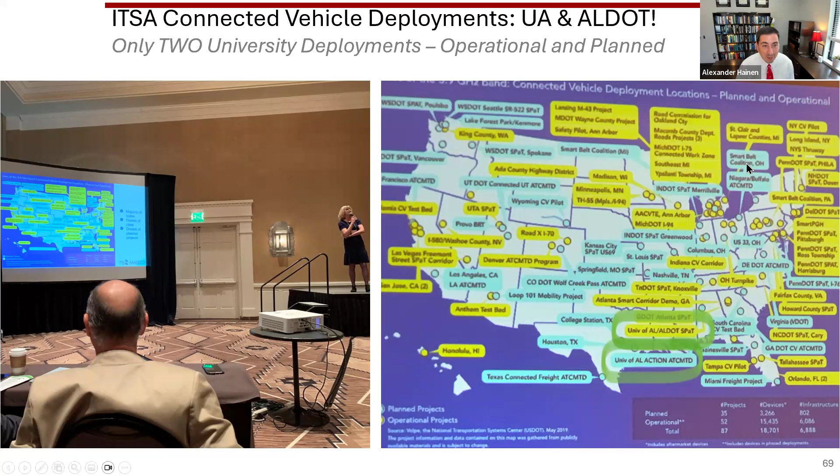We were really proud of this, this was kind of cool. I got asked to go out to New Mexico to talk at an ITS America event. They pulled this map up, and we were the only university listed there. Yes, there's other university involvement in many of these projects, but ours was different, we were leading that project. I look at this map every time to make sure there's not other universities I'm missing. Anyhow, we've done quite a bit with Federal Highway working on these types of projects. I'll skip over the actual deployment itself.

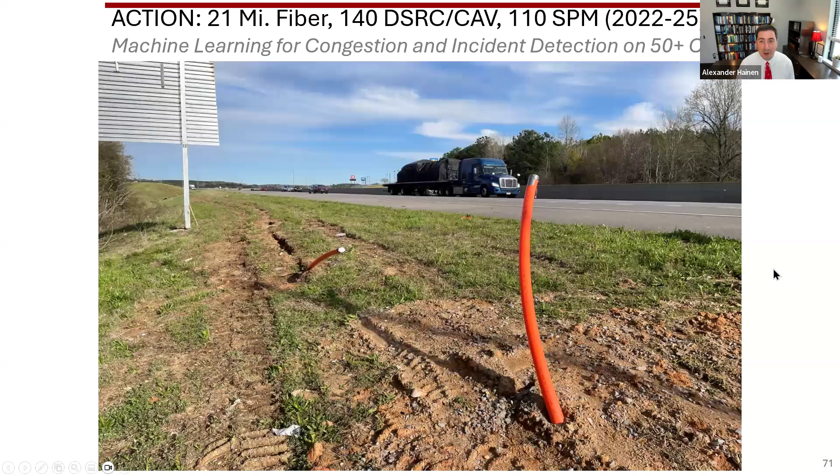This was fun. I got home from spring break and thought, oh my gosh, they're boring in conduit. So I jumped out of the car, grabbed this picture, jumped back in, and that's a pretty typical event for my family.

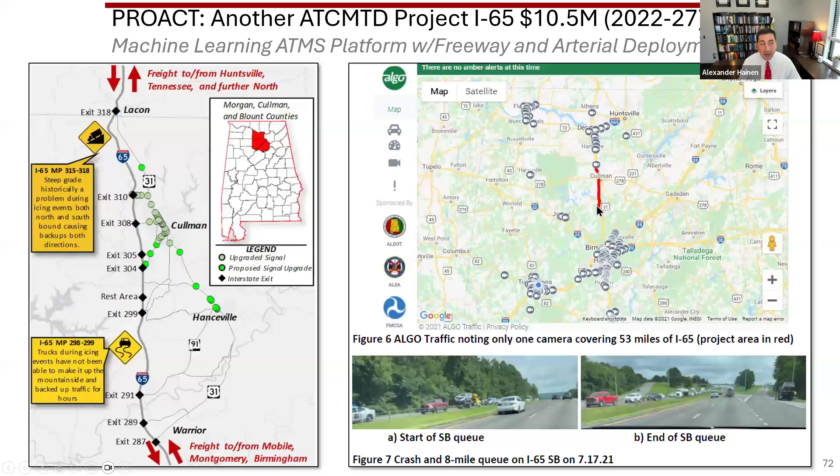The next project, which we'll work on through 2027, is another ATCMTD project, similar, but with more freight management priority and connected vehicle work, going through the city of Cullman, Alabama. It's very mountainous terrain for Alabama, tough for us to manage, with lots of weather, crashes and incidents. So it's a similar ITS ATCMTD deployment that we're doing there.

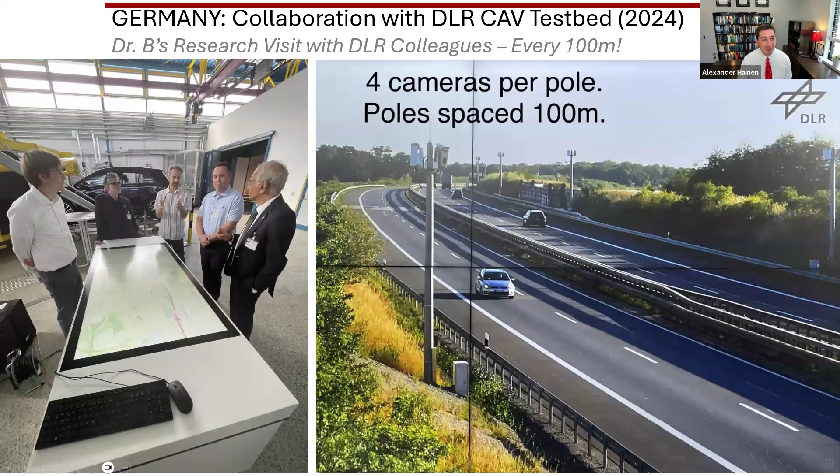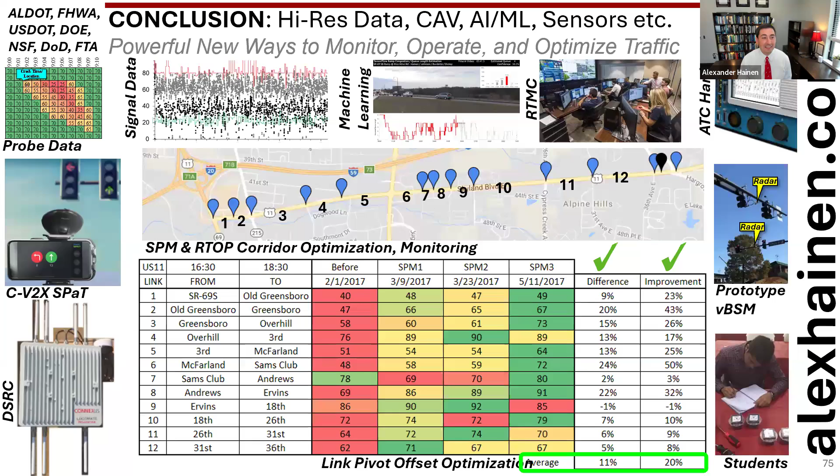The team effort behind this is extremely important to me. I just keep writing emails and asking questions and making a mess of things, and everyone else helps make it actually work and come together. This has been fun working with the city, vendors, the DOT, consultants, and other folks from the university.

The other part is not just the research aspect, but the teaching side. My colleagues Dr. Liu, Dr. Rahman, Dr. Jones too, and our students through our Civil, Construction, Environmental Engineering program, we estimate about 200 students a year come through some sort of transportation course, whether it's our intro course. I teach roadway and traffic, Dr. Liu does planning, Dr. Rahman does safety and traffic flow. So we have quite a few students coming through.

I'll end on this, just to show this was me with my class about two weeks ago. We were doing the C-V2X installs at one of our new ATC cabinets. That's something I'm proud of, that we get our undergrads out there to see. So cool, fun stuff there.

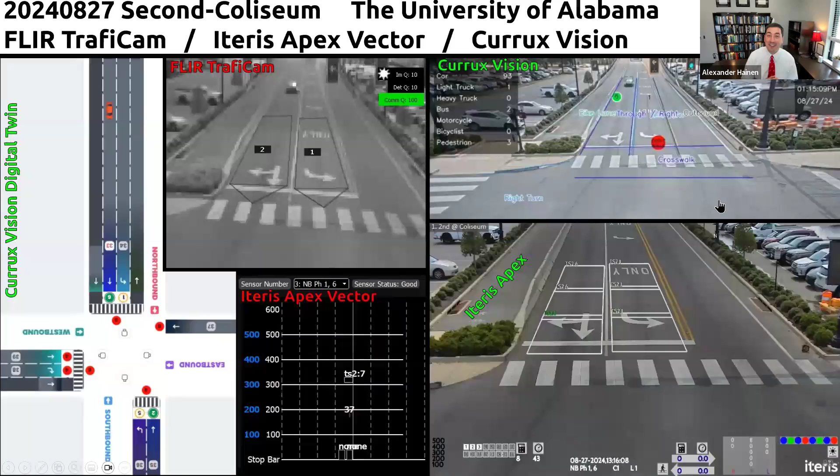Thanks everyone. Alex, thank you. I hope everybody understands now what I said about Alex's love and affinity for traffic engineering.

Just real quickly, there's one question that popped up in the chat. I don't know if you can see it, Alex.

How does the algorithm adjust when there are multiple freight items with different speeds, including outliers and unexpected speeds? That would be the freight priority corridor.

Yeah, these are what we call edge cases. We like to start with the simple cases, so that one intersection I showed you on campus, I like to start with a simple intersection to get the concept working. And then we do think about those things and build, adjust, and account for it. Great question. We were just doing the concept testing to get that going. In future work, next stages, we'd want to start looking at that.

We are going to have that issue popping up on some of our future tests, whether it's transit or freight. Great question on that. We were really looking at the first application to see, will it work? Yes, it did. But now that's an excellent example of something to say, how are we going to account for an issue with multiple vehicles, multiple directions? It's really up to the end user as you set it up and configure, but it's a lot of discussions on that part.

Excellent, excellent. Saeed, you have your hand up for a question.

Thank you for bringing up the I-24 smart corridor with the connected service deployment. I'm proud to be part of that deployment. It was mentioned there is the I-24 motion project, which has 44 poles, about 280 cameras, deployed on the interstate, monitoring trajectories, and the data is—